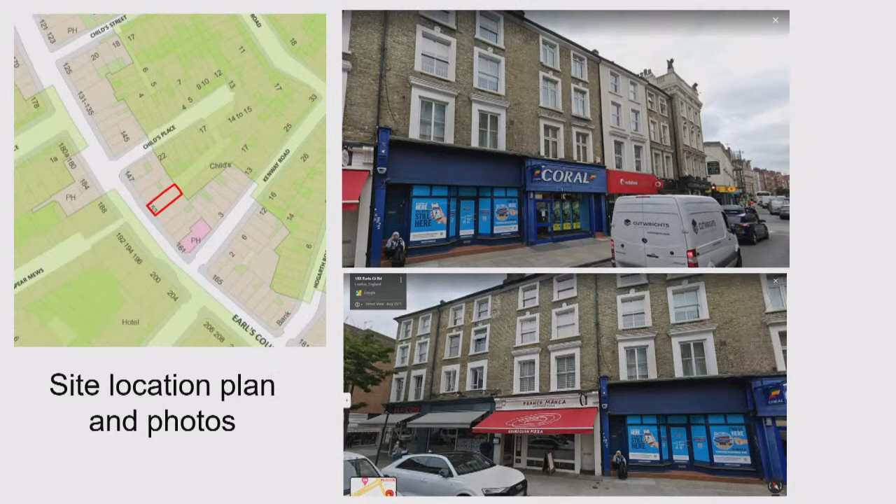Thank you very much. Yes, I'm here on behalf of Global Estates, and their objection is based on policy CF3 of the local plan, which requires the percentage of Class A1 shops in the secondary retail frontages to be above 50%. The premises at 153 Earls Court Road are in the secondary retail frontage. The intention of this policy is to protect all shops and shopping floor space at ground floor level in the area in order to maintain and enhance vitality and success of Earls Court Road.

The recent update to the use classes is not relevant, as the policy clearly states Class A1 shops. In September 2020, out of 7 premises, only 2 were Class A1 shops. Today, the number of shops remains at 2. Class E was not intended to create one homogeneous class. Class EA refers to shops, whereas Class EB, for example, refers to restaurants.

I have walked the streets personally in the area and submitted information showing that it does not comply with policy. At present, the percentage of shops in the relevant secondary retail frontage is 29%. This proposal would bring that down to 14%.

The proposal would also mean that there would be 3 non-retail units in a row, again against policy. Point 17 of the planning report states that the percentage of retail would be 57% should the proposal be granted. It is not fully understood how this would be compliant with policy.

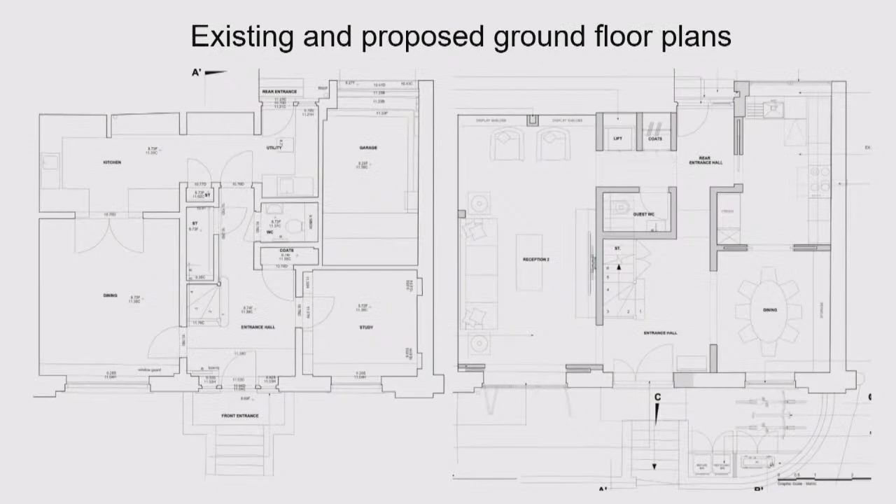To the main roof, a new roof light is proposed, which would be flush.

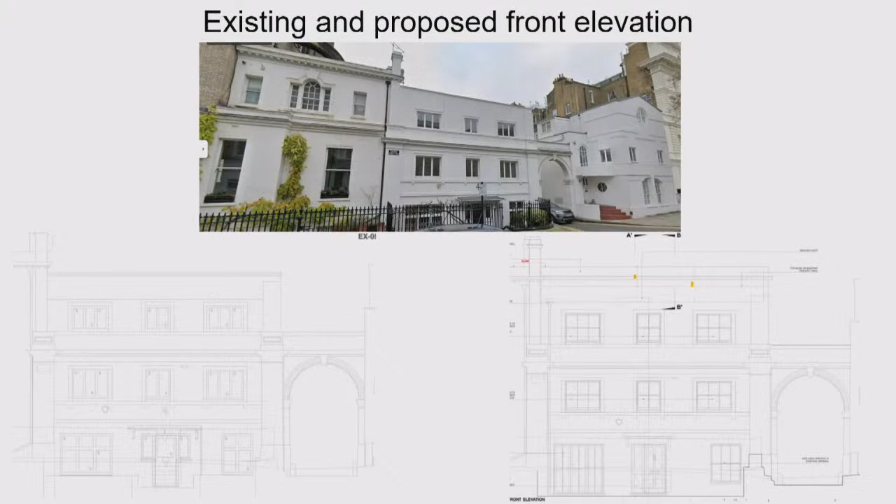This slide shows the existing and proposed front elevation of the building, with planning permission sought to replace the openings and to increase the height of the parapet by 0.89 metres to align with the height of the adjoining property at 20 Elvaston Place.

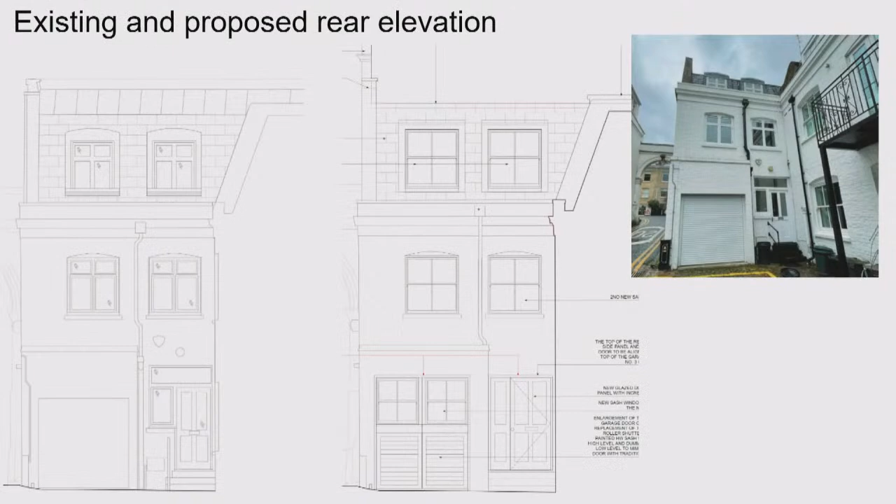On this slide, you can see the existing and proposed rear elevations with the rebuilt mansard and the replacement openings, including those to the garage door.

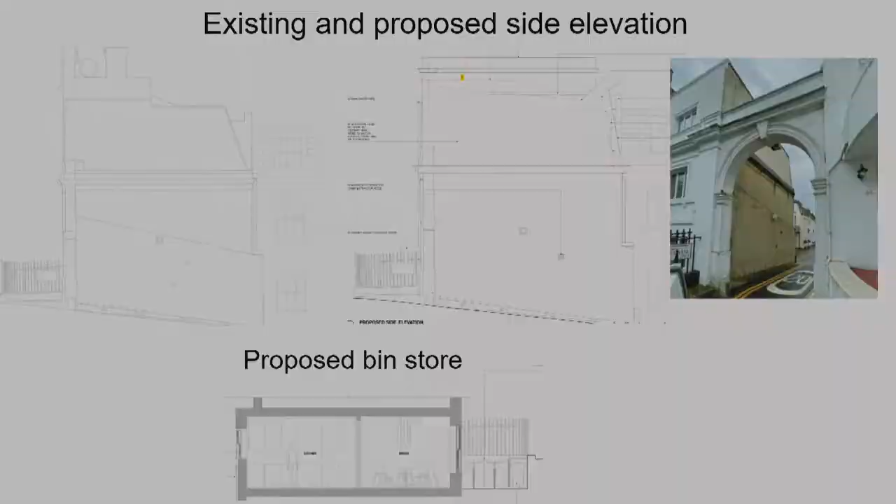Thank you very much. I have grown up living in 20 Elvaston Place and will be speaking today on behalf of the majority of the building. Just some context first: a height increase of a whole story was granted by the previous owner of number 4 Gore Street just over 10 years ago, with clauses. Number 4 was originally built as an annex to 20 Elvaston Place. We can still observe outlines of interconnecting stairs and chimney flues.

Our main objection is to any further extension in height to match the level of number 4's front facade cornice with 20 Elvaston Place's detailed cornice. Their centre architrave is a metre lower than that of number 20, and their cornice should carry through this detail. Building up against our side wall will obliterate the original Victorian cornice of 20 Elvaston Place. We believe details such as this should be conserved. This increase would also make the parapet wall over 1.5 metres, which we think is unnecessary.

The front facade of number 4 has original architrave details on a different level, and this detail, which is lower than number 20, should remain as originally intended. Their architect's front elevation, which has been presented to the council, neglects to show any of this, as they have not submitted any of number 20's architectural details whatsoever.

Number 4 is also the opening of Petersham Mews and should blend with the Mews streetscape, which of course is at a lower level. On another note, the rear windows facing into the light well shared with 20 and 19 should remain fixed and obscured glass, as stated in the last permission granted to number 4 in May 2000, for privacy and safety reasons. Thank you for hearing me.

39 Petersham Place was originally the mews of number 19. There is a party wall without fenestration, and this was stipulated when number 39 Petersham Place was developed as a condition of the reconstruction of that mews. So there's no fenestration between the party wall of 19 and 39, that's the adjacent mews.

And I think a similar principle should apply to the junction between number 20 and 4 Gore Street. After all, 4 Gore Street was a mews house, a 2-story mews house, never part of the streetscape that we see now. It would be quite, in my opinion, incorrect to try to blend it into number 20. This is architecturally improper, in my opinion.

It should remain as a mews house. It was a home for many decades of a descendant of Charles Darwin, who maintained it in a lovely way with a tranquil garden, which has been grubbed up and disappeared. That has all gone without any sensitivity, in my opinion.

And I think that this property has been fully developed by the late Mr. Philip Darwin, and it should not be extended further. It will overwhelm the mews house adjacent at 39 Petersham Place, and will have an adverse architectural impact on 20 Elvaston Place. I would urge the committee to think about this seriously.

Yeah, thanks. Do you mind quickly putting up a picture again of the wall in question? I think that would just be helpful. What's the next slide? Sorry, no, okay, we'll go back to the previous one.

Following on from the questions raised by objectors, we often say when a building is subservient, it should remain subservient. Is it the view of officers that the building is no longer subservient, and that's why it's appropriate to raise the parapet wall to match the neighbouring property? The building has previously been subject to an additional storey. The proposal is to align it with number 20, not to go any higher than that. So the building would remain subordinate to the larger terraces either side. It wouldn't be any higher than the property on the right, and with a modest increase in the parapet height it would still preserve the character and appearance of the conservation area.

Colleagues, do you have further questions on that? Yes, Councillor Idris. My question is the same question I asked earlier. It seems we want to make the top levelled, but the lower floor is not levelled with the other building, so it doesn't make sense to me. It seems like we're trying to make it levelled, but it's not going to be equal or the same. It has its own character, its own identity, and for some reason we're trying to make it higher on one end to match, but when you look at it, it doesn't look the same because the other floor is a different level.

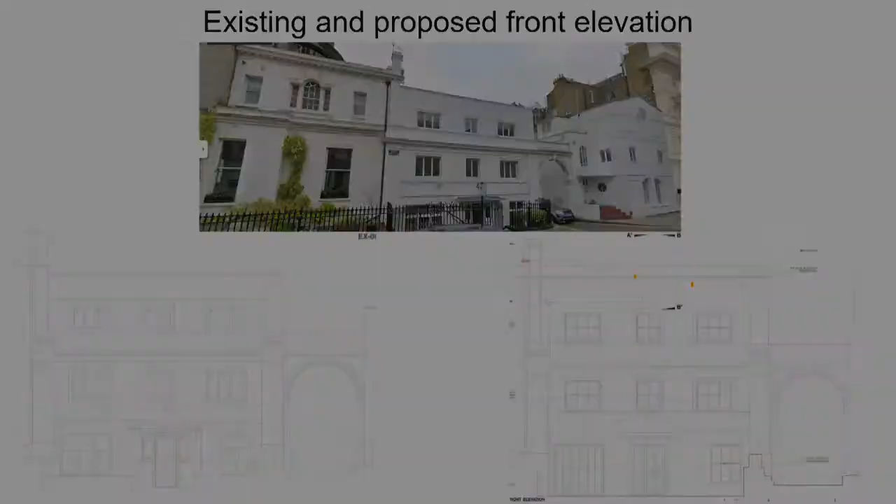Thank you. And just very quickly on the conditions around obscured glazing and fixed windows, could you summarise the recommended conditions, because that was raised by objectors? As currently worded, condition 9 requires the first and second floor side-facing windows to be obscurely glazed. There is no requirement for them to be fixed shut. The reason is that those openings are currently openable, so there would be no worsening of the situation at the site.

I understand. Colleagues, anything else? No? Okay, in which case, or any other recommended conditions? No. In which case we'll proceed to a decision.

I think it is a difficult one, and I have sympathies with residents on the sort of journey this building has taken over the years. It doesn't seem to really have architectural logic as far as I can see as it stands now. One consequence of that you might conclude is therefore, if there's not currently architectural logic, do these changes make it worse? It might not make it better, but does it make the situation worse? I personally am not convinced that it does make the situation worse, and unfortunately we can't go back in time and change what was done beforehand, but that's for each of us to decide.

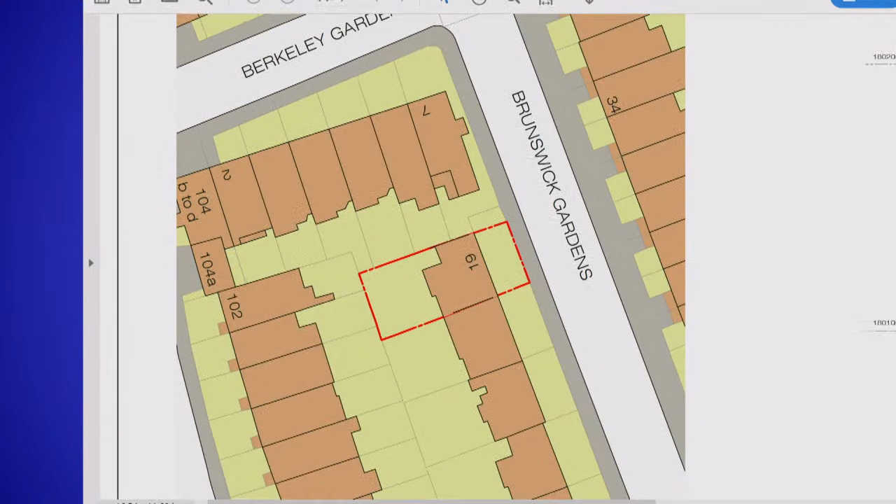Thank you, Chairman. So for the first slide, I just thought I'd remind everyone of the Ordnance Survey plan and the relationship between number 19 Brunswick Gardens, the application property that you see there in the red outline, and the rears of 3, 4, 5, 6 and 7 Berkeley Gardens. As you'll have seen from the history of applications already on the site, the key sensitivity is the relationship between number 19 and the properties to its north on Berkeley Gardens.

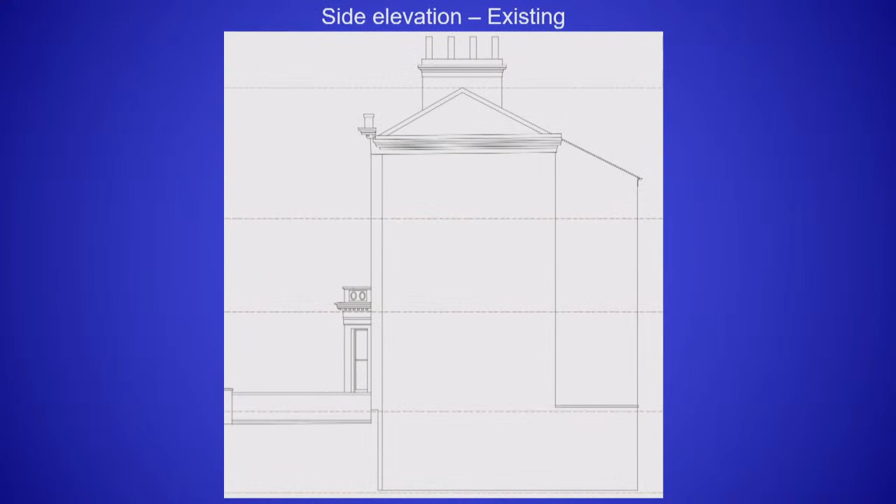That's the side elevation as existing. The recessed area that is not infilled in this application is to the right of that. You'll see in section the sloping roof to the central rear extension that I've already referred to. That's the proposed side elevation, which basically shows that the recess to the right has not been filled in, and the rear extension has just been squared off at the top with matching cornice.

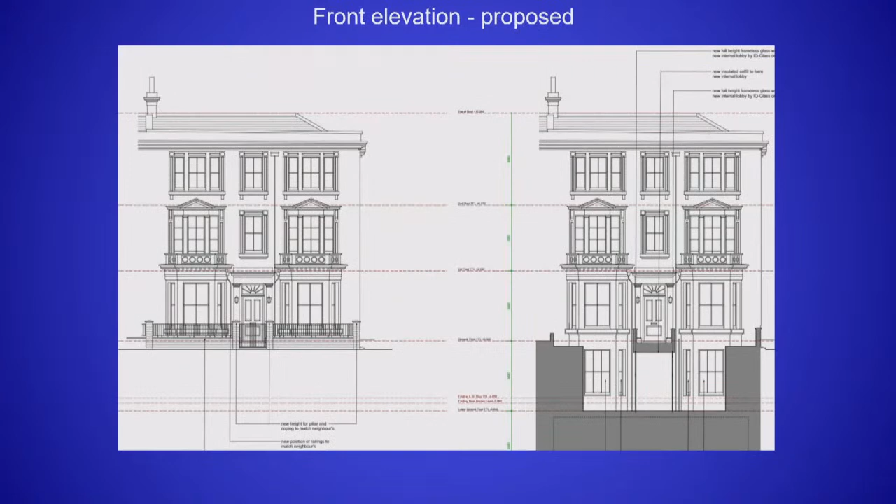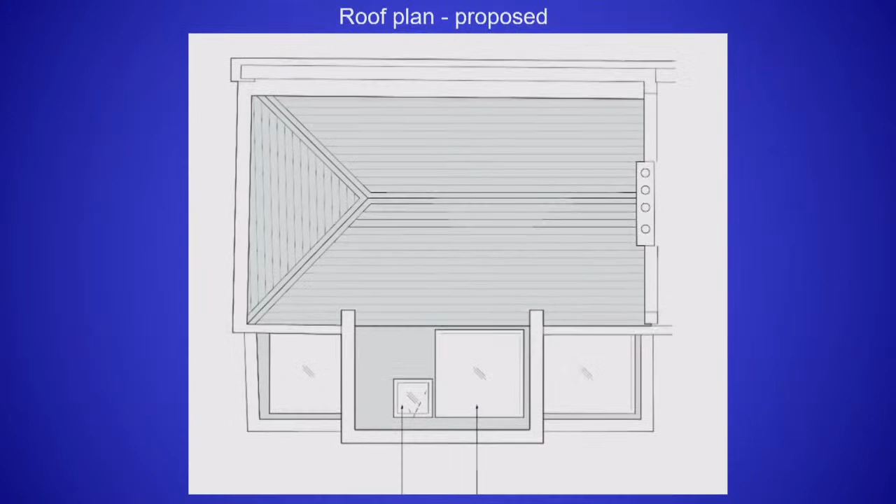Thank you. Good evening, councillors. My name is Rosalind Graham of Solve Planning, and I act on behalf of Mrs Crichton-Brown. I'll focus my comments on 3 points.

Amenity. The proposals incorporate French doors and Juliet balconies across the rear elevation at raised ground floor level. These will lead to unacceptable levels of privacy beyond that currently existing at the property.

Construction traffic. The local plan states that the construction of new basements has an impact on the quality of life, traffic management and the living conditions of nearby residents, and is a material planning consideration. The CTMP submitted with the application does not meet the requirements of the Council's SPD and local plan in this respect. It fails to address and adequately show how construction vehicles will be managed within this constrained setting alongside other developments in the street and surrounding area. This development is highly likely to generate conflict between construction vehicles, other road users and pedestrians, resulting in a dangerous and unsafe environment.

Noise, dust and vibration. Part L of Policy CL7 requires that all basement development should ensure construction impacts such as noise, vibration and dust are kept to acceptable levels for the duration of the works. No report has been prepared to show how noise, dust and vibration will be addressed, and it is therefore impossible to consider the full impacts of such a development on the neighbours.

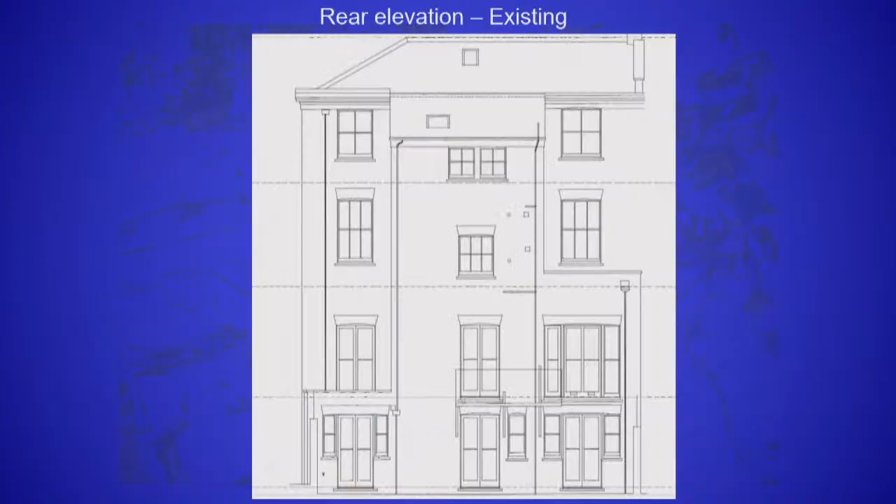There are two other questions. One is about the fact that if you take the basement area out underneath the front garden, does that compromise any tree planting that could be done there? Because there are some trees in the area. And would that restrict the size of trees so they couldn't be comparable to others in the street? It is a constrained site, and I'm surprised there isn't a more detailed construction traffic management plan for the site.

Taking trees first, there is a magnolia tree immediately to the north side of the property that was the subject of a lot of close investigation by neighbours' consultants and our own consultants in the previous application. But our tree consultants were satisfied that no harm should come to it.

In terms of construction, as the chairman and Mrs. Graham have mentioned, construction works do result in disturbance—there's no way to carry out construction without some disturbance at some point. I think the suite of conditions and controls backing up policy CL7 in this authority, apart from the City of Westminster which has similar controls, are more exacting than most planning authorities have introduced, and for good reason, because the borough's streets are not large and construction traffic has to work hard to find its way to and from sites.

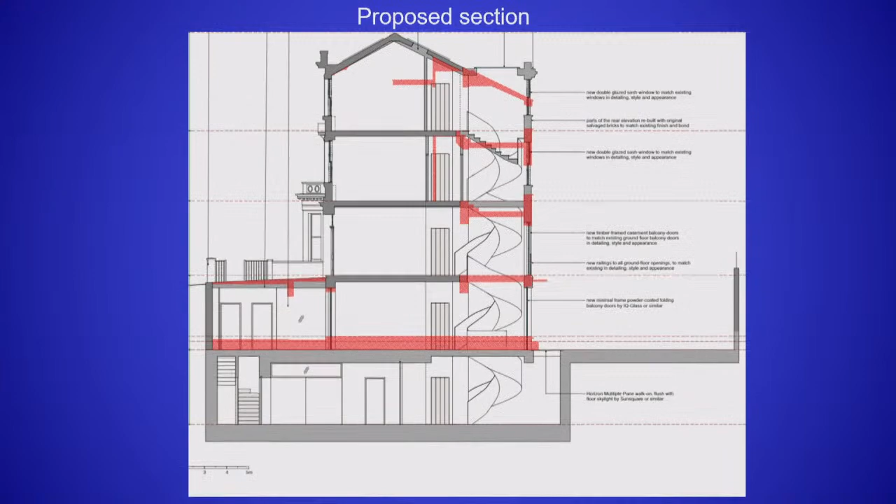Sorry, Councillor Ali. Thank you, Chair. My question is about flooding. We know we had recent flooding in Kensington, which one would think is a once-in-a-lifetime event, but it keeps coming back every 10 years or so. I understand from the application form, paragraphs 6.17 and 6.18, that the flooding officer visited the area, and the area may just be outside of the Kensington critical drainage zone. So how close is it, and what could be the impact if similar flooding to last year happens again?

Condition 16 relates to sewer flooding, and importantly condition 17 relates to sustainable drainage. The whole point of policy CE2 and sustainable drainage is to actually reduce the runoff from any particular site. So as part of satisfying that condition, the policy target is to reduce runoff into the sewers by 50%, which is quite a significant reduction.

So I just have one question on noise, dust and vibration. We heard objectors mention that it's going to be an issue. It's not unique in that regard, but certainly this is a very constrained site, as you've said. Can you quickly summarise how the conditions currently would manage the noise, dust and vibration element of the construction?

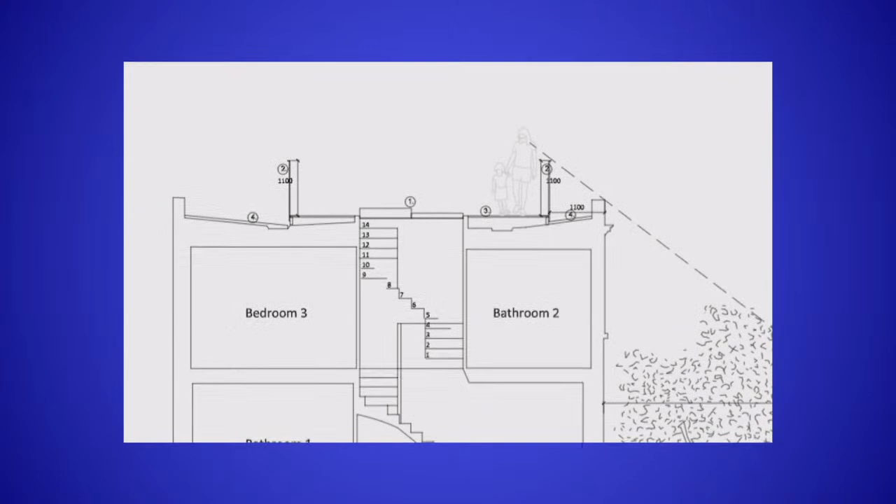The areas outside the railings, as you can make out from that image, are to be green roof. So there'd be green roof outside the railings to the front and the rear.

You can see by the setback of the railings that setting them in restricts any potential views from roof level. Clearly you would see far more from the roof if the railings allowed you to go right to the edge. But being centralised, you don't really get an invasive angle of view down from the roof.

And I think that's the last slide, Chairman.

Good evening, members. I'm Kieran Uni, and this is my wife, Isabella. We are the applicants. We purchased 19 Farm Place last year, and it's our family home. We've worked hard to make sure the proposed roof terrace complies with all relevant council policies. As your officer has explained, the proposed terrace is a modest development.

It's been designed sympathetically so it won't be visible from the street. It won't result in any significant or unacceptable impact upon the residential amenity of the area, and it will be a valuable small area of open space for us. We're sympathetic to Mr. Coyle and other neighbours' concerns, which I want to address specifically.

Mr. Coyle's objections include the loss of, or damage to, the conservation area. The proposal preserves the character and appearance of the conservation area, the street scene of which it forms a part, and the parent building.

We have a flat roof, as Mr. Taylor observed, not a butterfly roof like the other properties in the street. Our property is already different from the rest of the terrace, as it has a third floor. We're maintaining our existing chimneys to both sides of the terrace and maintaining the strong parapet line of the parent building. The roof terrace will be largely unnoticeable within the wider context of the site.

The question I have is, if the balcony, if the garden is going to be used, what impact is going to be on that building? So, did you understand what I'm trying to say?

So number 44. Yeah, it's that. It's, if that's the extent. Can I go and explain it to the chair?

Okay, and is that question to the applicant? Okay, so the building to the right of 44, number 42. So the question is, what impact, particularly in terms of overlooking, will the roof terrace have on number 42? We think it's 42, but there's no number on the plan.

Thank you. Any other questions? Yes, Councillor Ali, and then Councillor Idris. Thank you, Mr. Chairman. You're aware that the area is a conservation area, and of course the objections we have read from neighbours specifically is noise pollution, and you and your family are going to live there, and we just wanted to know, of course you've done the consultation and you've met and you have some supporters as well as some objectors.

Is there anything you are planning to do in terms of satisfying your neighbours' requirements, whether it's the use or, of course we're not here to tell you how to use your own property, but the hours of use to make sure that the noise level is acceptable to the local area? Bearing in mind you are setting a new standard for the area, or unprecedented according to some of them, whether you're making change to a conservation area. What is your plan for the future for this use of the terrace?

This is our family home. I am a barrister, I work from home, and I work very long hours during the day. My wife also works very long hours during the day. We both intend to work from home most of the day.

We tend to be in bed by this time most evenings, and we're up very early. We're not proposing to use the roof terrace for parties and to play music all night long by any means, we're the opposite of that. So in terms of the concerns some neighbours have raised about sound disturbance through the night, that's something we're particularly sensitive to, because we like to go to bed early and sleep undisturbed. So we can immediately allay the concerns of any neighbours on that basis.

Of course. You might have seen from the plan, but because we're pushing the railings in quite significantly, particularly at the rear but also at the front, I'd say if you're standing, I think if you had six people there it would feel like a crowd. It would feel very, very crowded.

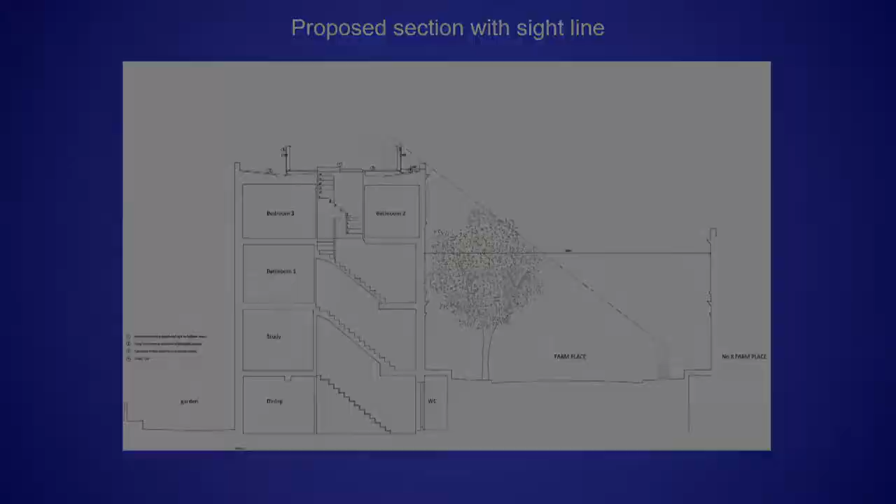Councillor Idris: the chair stole one of my questions, so I have only one question left, which is my favourite question. You talked about biodiversity - this is your only outside space. Do you have outside space downstairs, or is the roof terrace the only one?

So to the rear of the property we also have a small patio. You have a small patio. So you talked about biodiversity - will you be planting pollinators?

We'll take advice from our architect on the best kind of green roof to put on the terrace - he's worked with green roofs on other projects, so he's well placed to advise us. We're not sustainability experts by any means, but when we realised that setting the roof terrace back would free up this redundant space, we thought it would be a great idea to have that extra space for a green roof, to hopefully increase air quality, increase biodiversity, and have additional benefits of slowing down water runoff, which is important to us after the flash floods last year, as well as some acoustic dampening effect apparently. So we are keen to implement the green roof if possible.

Councillor Idris is a great champion of bees in the borough, so if you're able to incorporate pollinators and flowers that support and help encourage the bees, Councillor Idris for one, and many others, would be delighted. We do have the bee superhighway in the borough, and once you've planted pollinators in your property, you can become part of the network of pollinators in the borough.

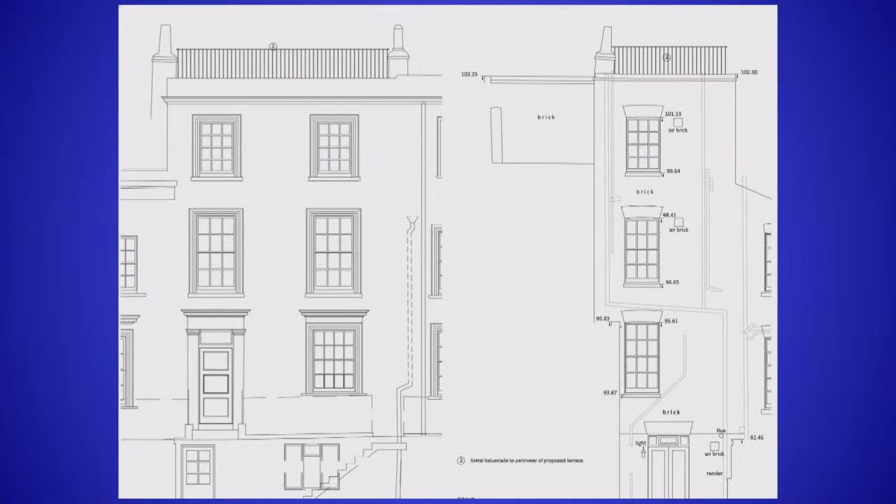The recommendation is to grant planning permission. Councillor Wade? Grant, in favour. Councillor Ali? In favour. Councillor Wood? In favour, Chair. Councillor Idris? In favour. And I'm also in favour, so that passes unanimously.

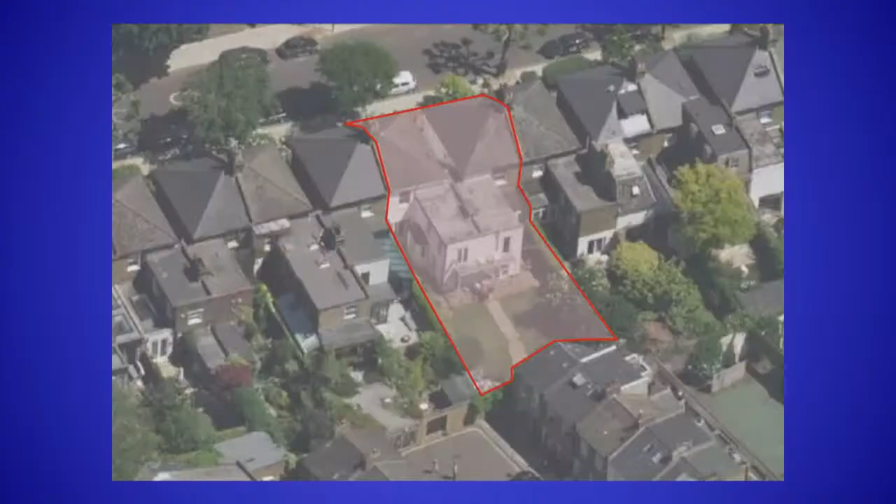I'm genuinely worried about this application because I think we had a policy about amalgamations, and I don't understand what the justification is for it. There seems to be an impact on 119. The rear of the building appears to be changed. We appear to have a newly constructed fence going down the side, going into the middle of the garden. It seems that works appear to have started before permission has been granted, or alterations which would change the perspective of our decision. And it does concern me. So what is the Planning Department's justification for amalgamation, given the history of the building, which was clearly...

Looking at Mr. Peterson's thing about it being Cleveland Housing Association for the conversion of 2 dwellings into 4 self-contained flats. Is it because of the condition of the property? What is the justification for the amalgamation? Is it just commercial, or is it because the condition of the property has got into such a state that it needs to be totally revised? And what can we do to prevent the other 2 properties becoming amalgamated?

The justification for amalgamation, in short, would presumably be to form a larger dwelling on the part of the applicant. The policy, when it was being discussed and introduced, there was a huge amount of discussion relating to how to control amalgamation of dwellings. Eventually, the figure of 170 square metres was settled upon, meaning an amalgamation of flats couldn't really be larger houses, but flats amalgamation of units less than 170 square metres would comply with the policy. And this one would result in 169 square metres, so it complies with the policy.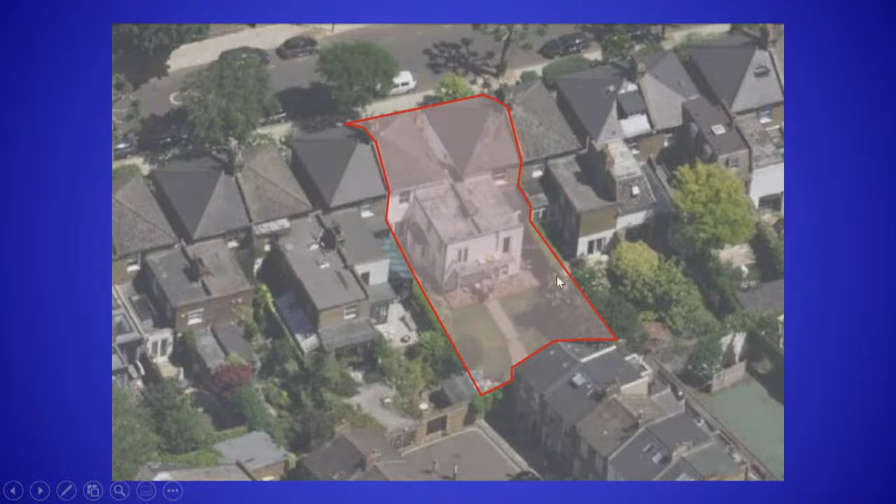Well, it's because at the rear of 119, you have the closet wing, and then you have the recessed area, and therefore this extension would appear - unless I've written it wrong - that the extension at the rear of 115, 117 would come out and actually take light from that recessed area of 119. You can probably see from the rear elevation I'm showing that 119 already has an infill within its light well, but it looks from the picture like it's a lighter weight infill, more glazed.

But again, planning permission isn't required to erect a boundary wall of up to 2 metres in any event, and this would add 3 feet to that. Taking into account the rear extension which would be immediately behind it, there wouldn't be any material impact in light terms.

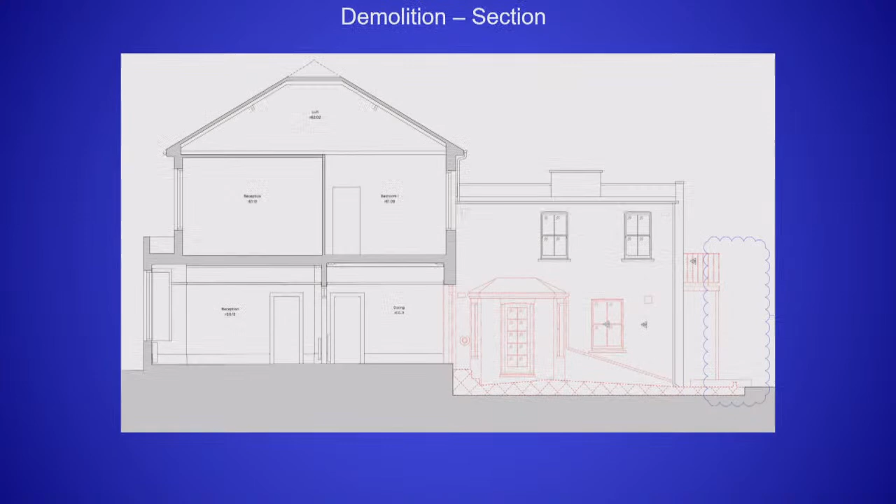And what about the width of the terrace and the removal of the staircase, so that people who live in 115 on the first floor can't gain access to the garden?

That's changing its use. The terrace would be reproduced, as I said in the introduction. You can see in red the existing terrace that would be removed, and it's now proposed to reinstate the terrace, but running the full width of the rear extension. There wouldn't really be any additional views from adding a bit at each end of the terrace—it's effectively in the same position, affording the same angles of view as at the moment. And what about the claim that the staircase was removed?

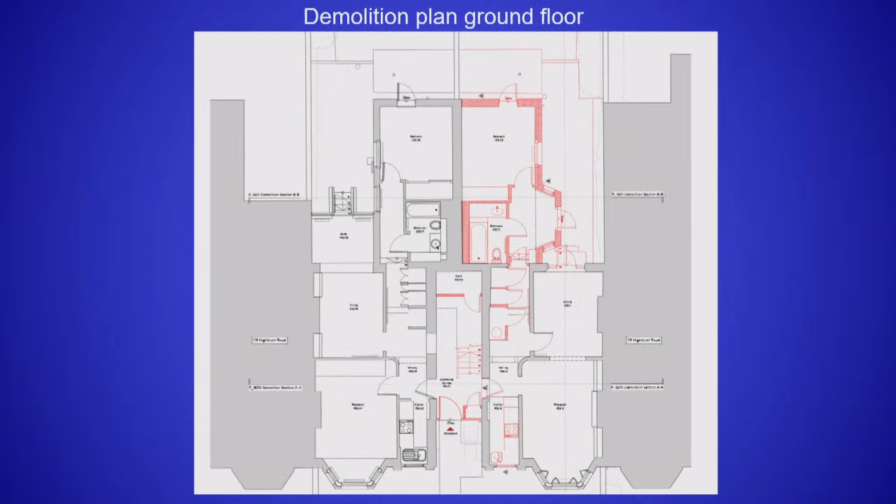There's no staircase proposed to come down from the terrace, and there's no existing staircase or proposed staircase, so there's no change in that regard. Well, one of the objectors claims that actually a staircase was removed and that there's a gap in the existing balcony, and that the terrace proposed is actually double the size, therefore changing it. I don't know what exactly has been removed, but if anything has been removed in the past, I don't think it's that relevant to what they're proposing now.

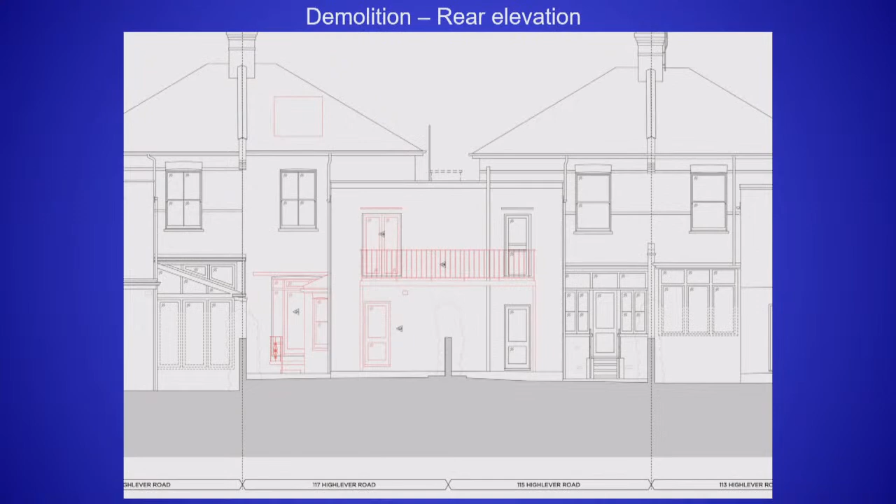Well, I think the key comparison is with the views that could be had from their existing terrace compared with the views from the proposed one. The elevation I'm showing there shows the existing terrace in red—it's at first floor level, lined up with the doors that access it, and doesn't go right to the edge. In the proposed plan, they've extended it to the edge on each side, but the additional angles of view would not be greatly different. The views would be downwards, just as they are at the moment.

Just to follow up, so the recommendation from officers will be no change? There would be no significant change in overlooking terms, no. I'll put it in different terms: areas that would be private at the moment would still be private, so there wouldn't be areas that could now be overlooked that are not overlooked at the moment.

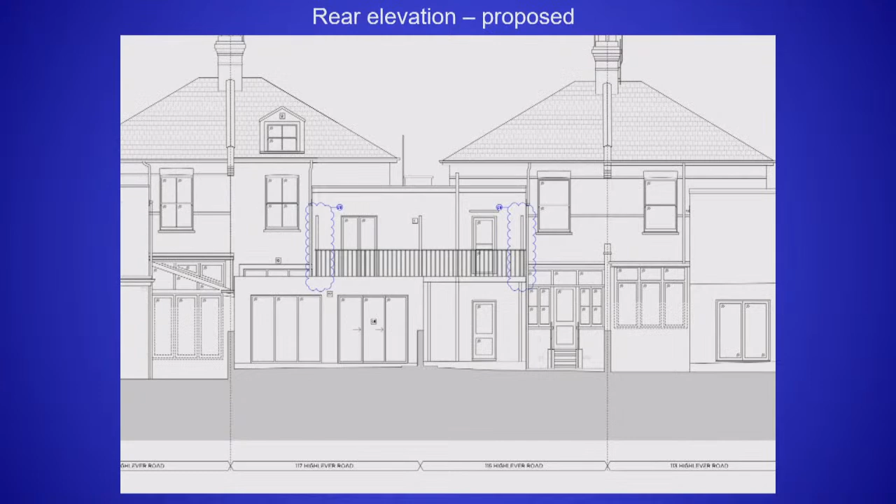Any other questions? Yes, Councillor Idris. A couple of questions. My first question is, in one of the letters, Michael Bach is saying the address is wrong—is that correct? The address is actually not 115 to 117, but it's 117. I think there's a slight misunderstanding there—the large majority of the changes are to 117, but there are some slight changes on the frontage of 115, which is why they included them both. Is that correct? I think that's right, Chair. Yeah, okay, so that clarifies things in my head.

The other thing is, are we allowing amalgamation because they already started work and it was more or less an outcome of that, or is it totally different? It's totally different—we're recommending the allowing of amalgamation because it complies with the relevant housing policy. Whatever work they're doing at the property, bear in mind they can do strip-outs and quite an amount of work without requiring planning permission—they only require planning permission once they commence construction work. So I don't know what they're doing there at the moment, but they could well just be stripping out stuff that didn't require planning permission anyway. But the recommendation in relation to amalgamation has nothing to do with the work they are doing, whatever that is—it's because it complies with policy.

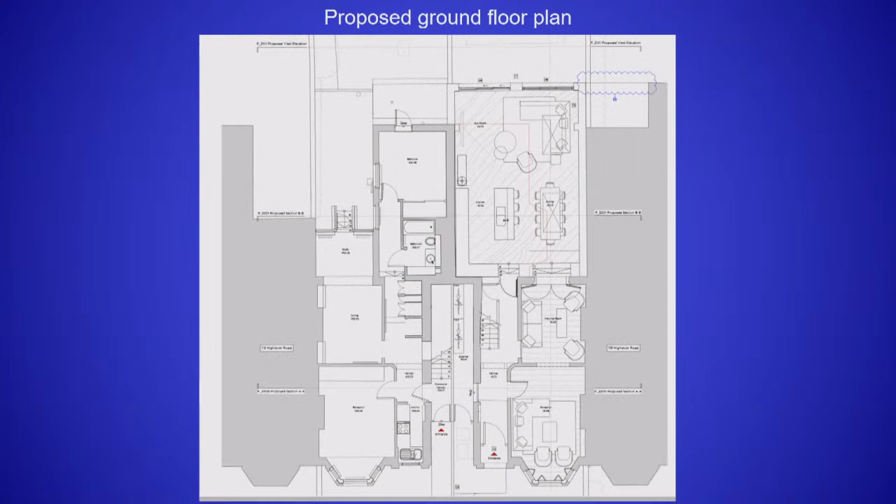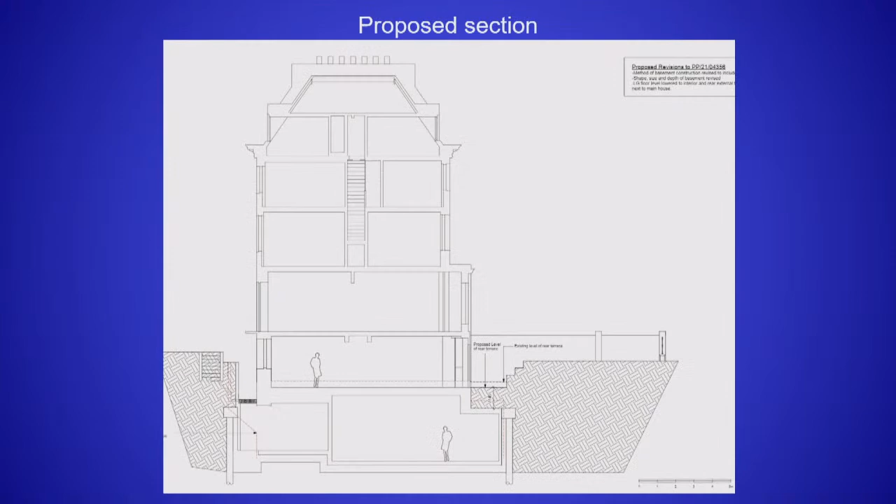That's a policy-compliant basement, complying with all the criteria of policy CL7. That's a close-up of the basement, to better understand the relationship with the floor above, with the light well at the front. The basement plan shows a utility room, games room and lounge area at the front. The front elevation basically doesn't change, and the rear elevation doesn't change much either—the work is all down at basement level.

Thanks, I'll answer the first question. A number of the objections raise worries about the CTMP and refer specifically to the width of the street. Could you tell us if there's a standard way of taking into account the narrow width of a particular street when determining an appropriate CTMP?

Yes, there is. The highways team who assess all the draft CTMPs look very carefully at the width of the streets, taking into account parking and how much width would remain. They're satisfied here that the draft CTMP is acceptable. The real key is getting the final stage CTMP attuned to whatever the conditions are at that time. In terms of street width and local parking, highways officers are satisfied this would comply with all the normal standards.

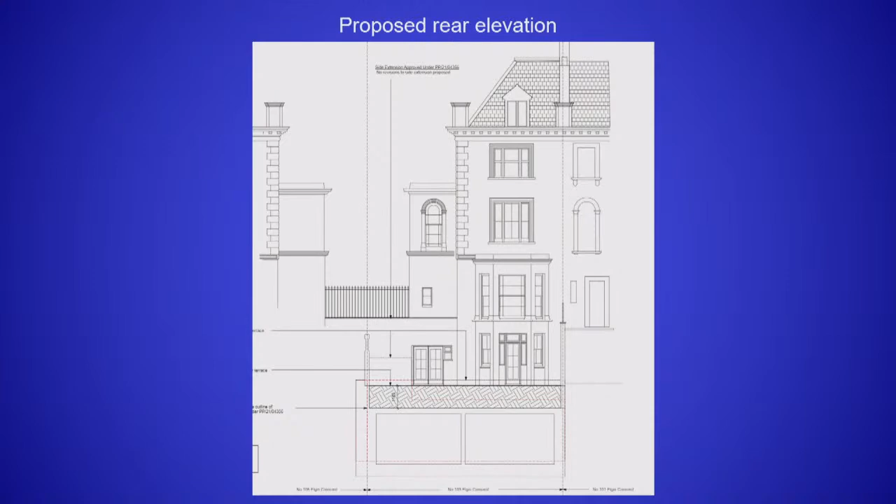Are we likely to require a gangway running above the pavement—would that be appropriate here? I don't have that detail to hand, but quite possibly—my guess is that might be the best way to do it. In which case we'd need drawings as part of the final stage CTMP. Well, that seems the best option to me, but as we don't have all the details, perhaps it's best left to highways officers when the CTMP comes forward.

Councillor Idris: thank you. I see flooding and drainage have been addressed, and it looks good on paper, but isn't this address very close to all the flooding and problems? Isn't there a slight concern at all?

I think there's always concern in the Elgin area—that's part of the drainage basin that drains down to the west from Notting Hill, and water naturally with gravity wants to drain downwards, so it's always a concern. But our policy is very exacting, and they've managed to comply with it, with the sustainable drainage details already submitted. Sometimes where we're not happy at the first stage, we'll set that aside by condition, but in this case they provided a very good sustainable drainage statement, so condition 15 just requires them to accord with that statement. All right, thank you.

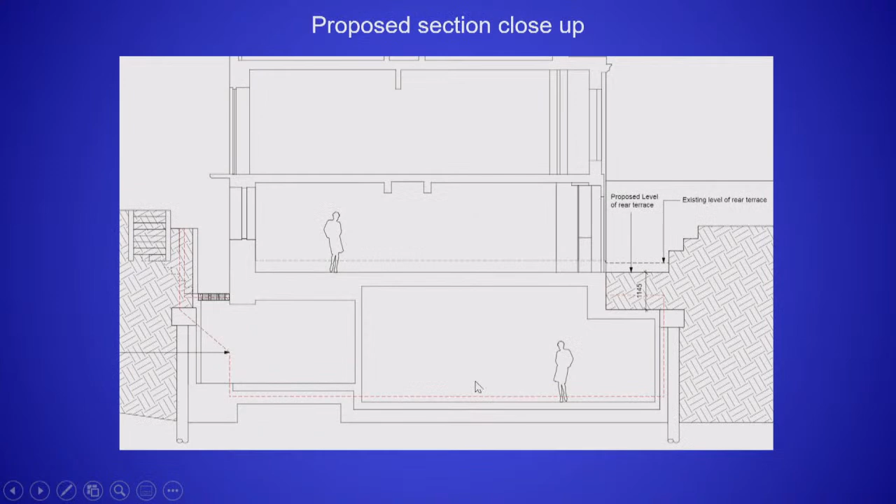We now move on to Leighton House Museum.

Any questions? I think it's an improvement to the building. Yeah, I think it looks good.

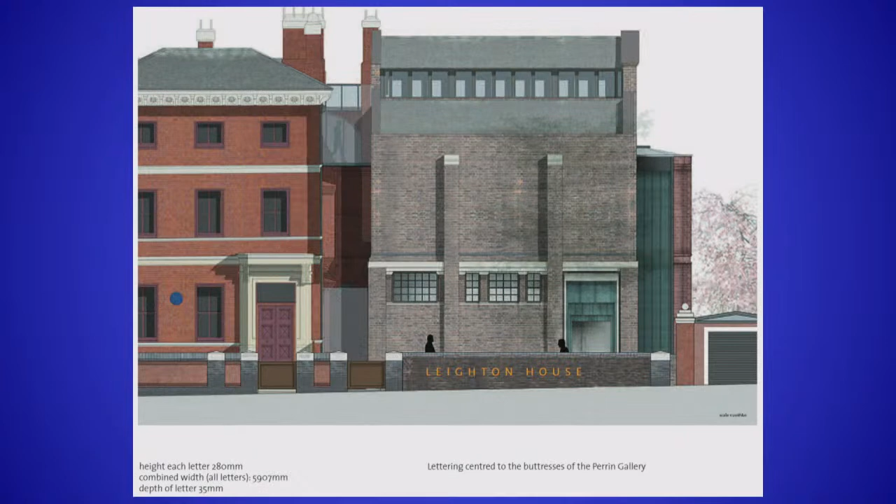And then we finish with flats 1 to 45, Bramley House.

Very straightforward. Councillor Wade.

Questions: do they have trickle vents, and what is the difference in the width of the wooden bits? They're going to be thicker because it's triple glazed, isn't it, in the bars of the window? The glazing bars would need to be a little bit deeper front to rear to provide the depth for the three pieces of glass, but in terms of the elevation, they're actually the same. So they look the same?

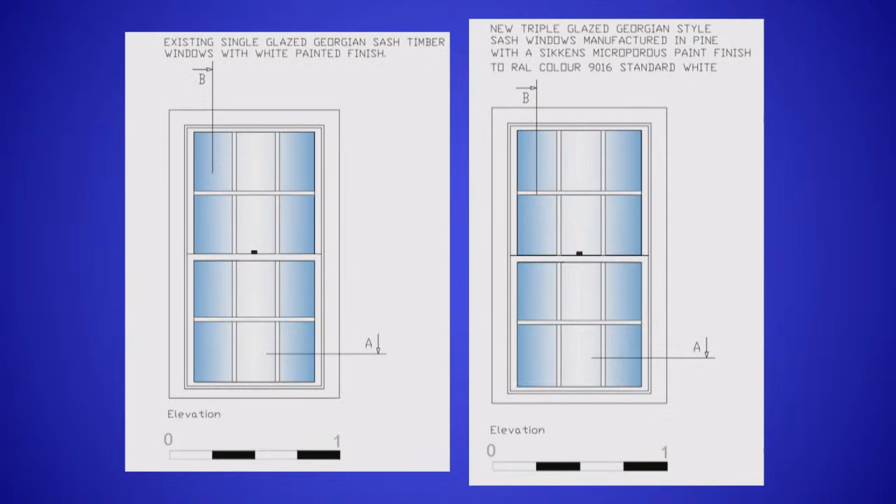At the end of the day, safety features internal to a room do not require planning permission - there are all sorts of grills or rails that can be introduced inside to prevent children climbing up. Essentially, the existing windows would be no different to the proposed windows in terms of safety. There's no reason to assume a triple glazed window is any less safe than a single glazed one - they're still vertical sliding sash windows.

I think there has to be an element of responsibility for people living in a flat to make sure children can't climb out of a window. But these windows would be no different to the existing ones in safety terms. Of course, it's the parents' responsibility to look after their children, but nothing stops us improving what we already have - if any features could be added so children cannot open the window on their own, while still meeting parents' requirements, whatever feature can be added to ensure children's safety in future.

I think this enters the council's responsibility as a building owner rather than town planning - it's not something town planning can really deal with. But the building owner, obviously the Royal Borough, does have responsibilities in that regard. Could perhaps write an email to Doug Goldring or Kim Taylor-Smith - that's the basic course of action. Recommendations - okay, fantastic, we'll proceed to a decision.

The recommendation is to grant. Councillor Idris, in favour? Fantastic. Councillor Wood, you're in favour. Councillor Ali? In favour, Chair. Councillor Wade? In favour. And I'm in favour, so that passes unanimously.